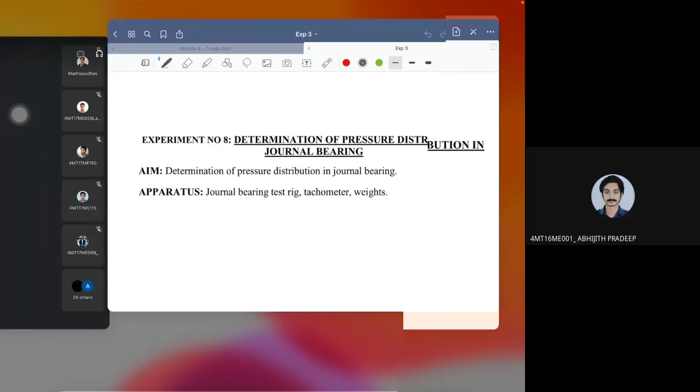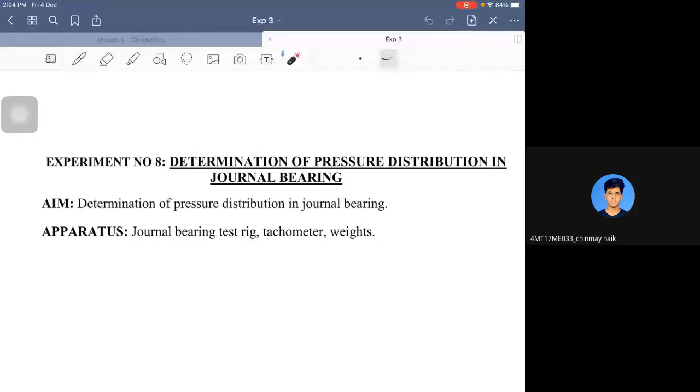Are you able to see the screen? Is the screen visible now? Am I audible? Guys, am I audible? Yes, sir. Okay. Shall we start? Okay, since no one has responded, I am hoping that my screen as well as my audio is clear to you. If you have any disturbances in these two, you can immediately stop me. Your presentation is visible, but your voice is too low, sir. Okay, I think it's because of the fan. Switch it off. Hope everything is clear now. Am I audible clearly? Yes, sir. Thank God.

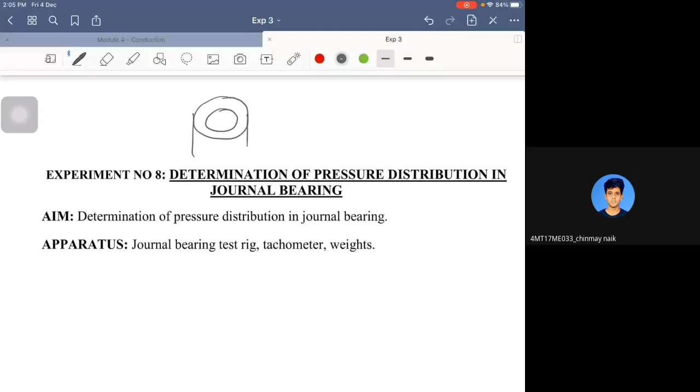Okay. So now we will start the eighth experiment, which is known as the journal bearing. The main aim of this particular experiment is, see, there will be a shaft and there will be a journal like this, right? For this journal, all this that you are seeing now is the gap between the shaft and the bearing. Journal is nothing but your shaft.

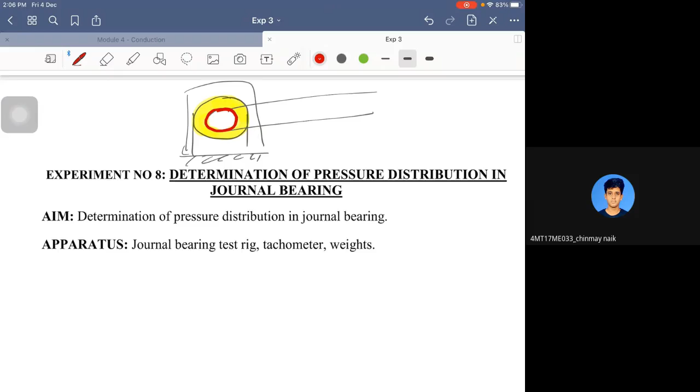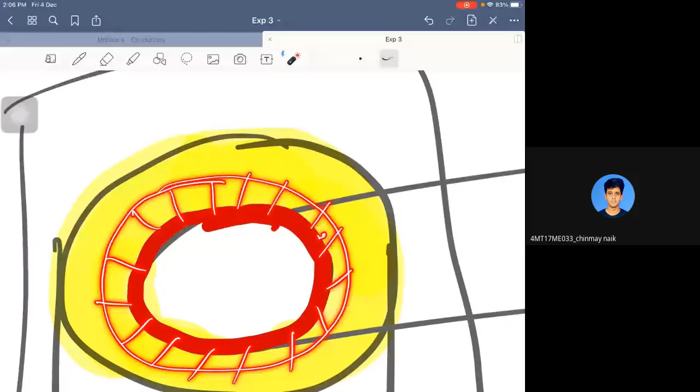So this is the gap around your shaft. The shaft is this long thing, and what is holding and supporting the shaft is your bearing. Now, when you measure the pressure across the circumference of the shaft at every individual point, according to theory, the pressure distribution across its circumference would be the same. That means it has a uniform pressure distribution across the bearing.

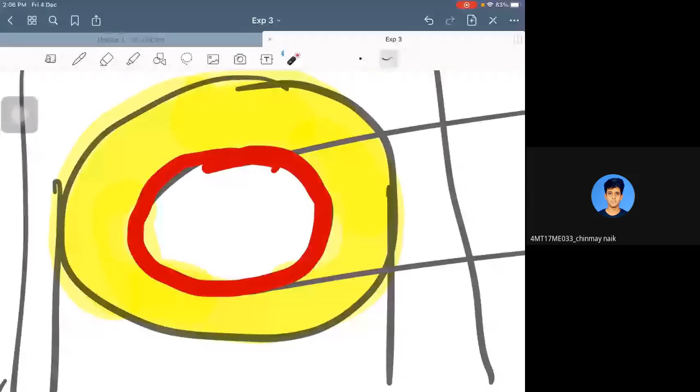But in reality, this varies. At some points it will have a very high pressure, and at some points there will be no pressure acting. So there is a non-uniform distribution of pressure across the shaft, and that is the main focus of this experiment. You will draw a pressure distribution curve along the bearing circumference and analyze how the actual distribution differs from the theoretical one. Theory says it is a circle, but the actual distribution is something else, so we will compare the two.

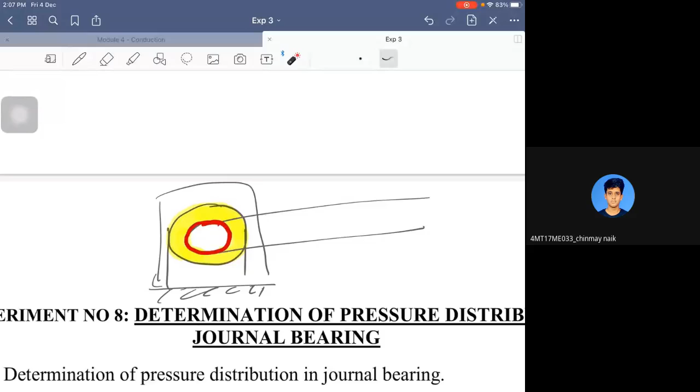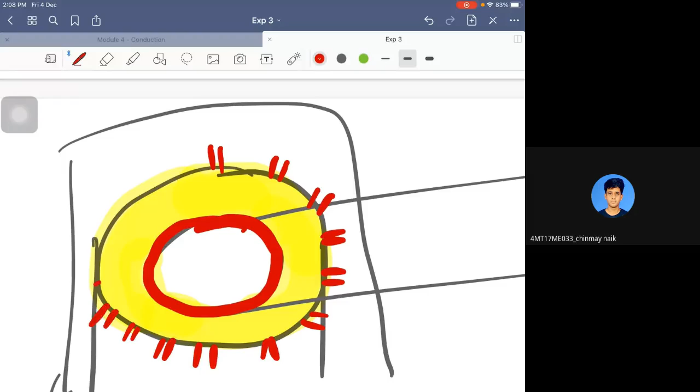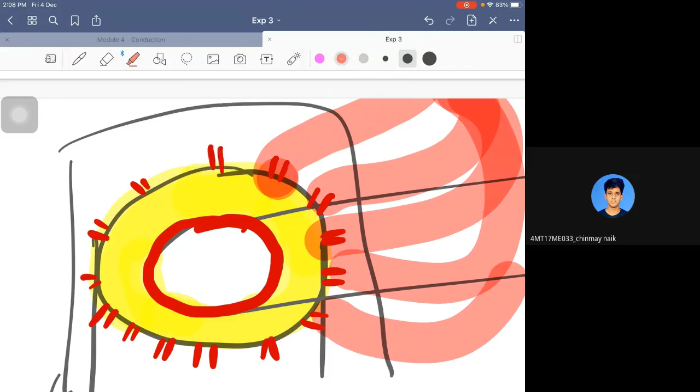To do this, around the bearing we take tappings, precisely 12 tappings. All these 12 tappings are fitted with individual pipes, and the pipes are arranged in a sequential manner so that for each pipe you can observe the oil level and measure it. That is how the experimental setup is built.

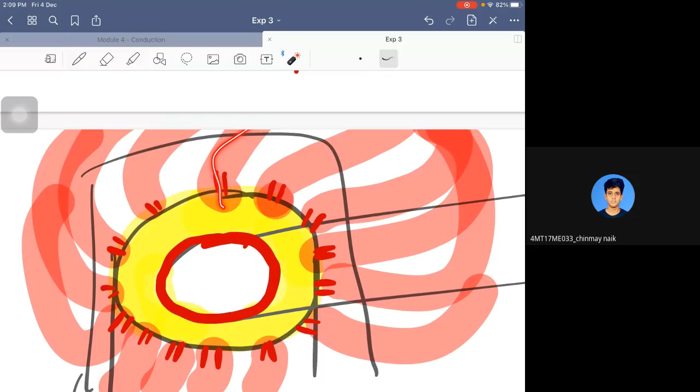So at every 30-degree interval, there is one tapping taken out. A tapping is just a hole taken out from the bearing, and each individual tapping is connected to a tube. All these tubes are aligned in a straight order on a long board to measure the height. From this height, we'll calculate the pressure and plot it around the circumference.

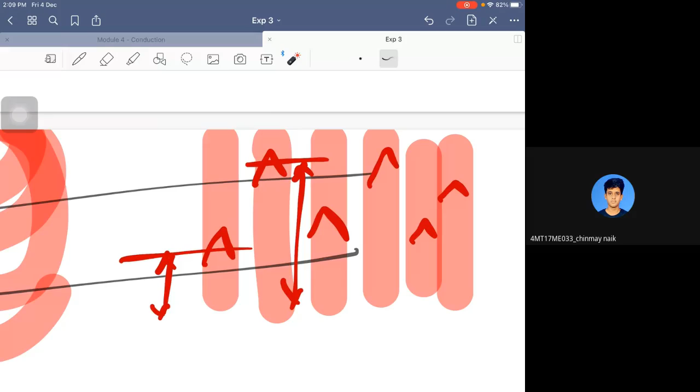That is how it is with the experimentation. Let us see how in reality it looks like. So you can see here. Are you able to see it? Okay, fine.

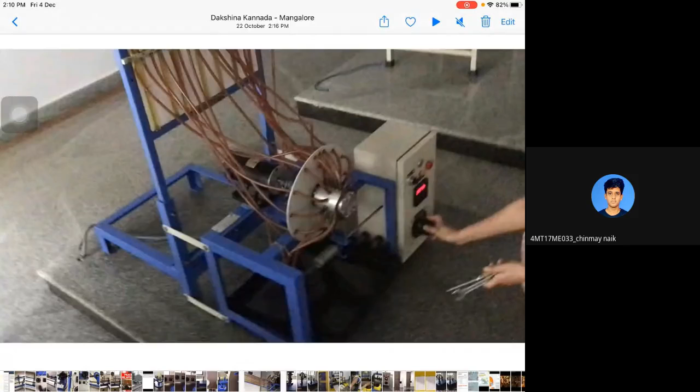This is the bearing. Around the bearing, you can see the 12 pipes which are connected at 30-degree angle measurements. For every 30 degrees, there is a single pipe connected, and all those pipes are arranged in a board like this. I'll be just playing this video, and in order to run this, there is a motor over there, which is again connected to a dimmer stat, where you need to switch on the motor and run it.

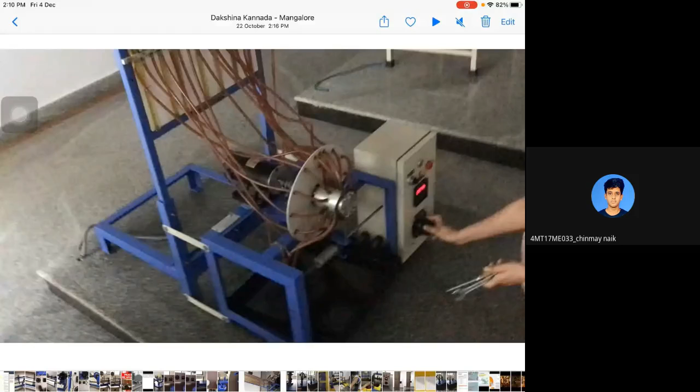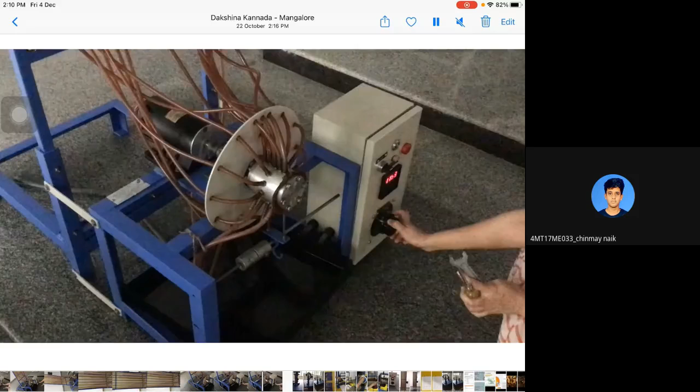Okay, just observe it. So all these pipes are connected to a board like this. Okay, and every individual pipe is mounted with a scale also in order to make it convenient to read the height of those pipes, the oil level. Okay, and that is how it is there.

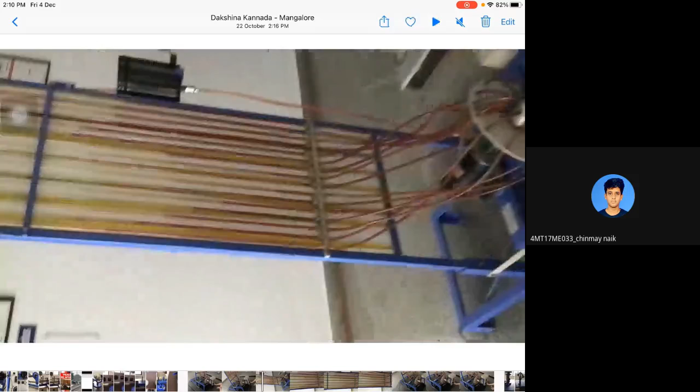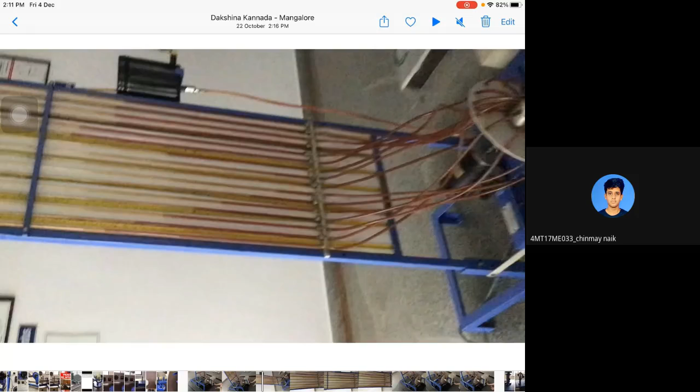Okay, now what is the procedure? So first you have to fill up this. There will be an oil tank, if I am right. Yes, here it is, the black color one. The black color one is the oil tank where you need to fill the oil, and that particular oil should be matched with the bearing oil. You have to ask the instructor which type of oil it is, whether it is SAE 40, SAE 30, or SAE 20, and all these are industrial grade.

So you have to ask for a particular oil, and that oil you have to fill up in the supply tank here. Okay, that is your supply head. That means from that particular height, you are supplying the oil to the journal bearing. Okay, so that is the first procedure, filling up the oil.

Once you fill up the oil, you have to start the motor and keep the bearing running for about half an hour. So for about half an hour, you should keep the bearing running, and you should not take the readings in between. Why? Because you need to allow the oil to heat up and maintain its temperature uniformly. That means you are waiting for its steady state condition.

No more fluctuations in the oil levels. So all those things have to be achieved. So that is the reason why you wait for 30 minutes. That means for 30 minutes, you just keep it running, and the oil attains its own temperature and own heights in the respective columns. Then you are in a position to take the readings.

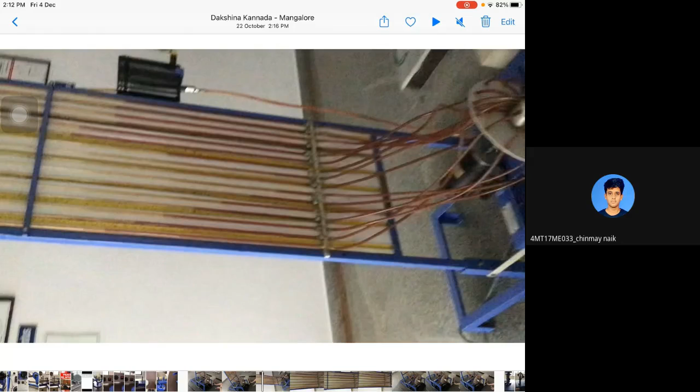So how do you take the readings? You can observe the different oil levels in the different pipes over there. In a particular pipe, you have to take down whatever is the oil level. So once you have taken down that reading, how it will look is like this. Okay, so this is the thing. What is P naught here? P naught is nothing but the supply oil head where the high supply oil tank was placed. That is your P naught.

Okay, and individual pipe for 30 degrees. So I have told you, right? For 30 degrees, what was the pressure head? That reading will be noted down. For 60 degrees, the oil has not reached, so it is 0. For 90 degrees, it is 300. Similarly, up to 360 degrees, you will note down all the parameters, I mean to say all the oil height levels.

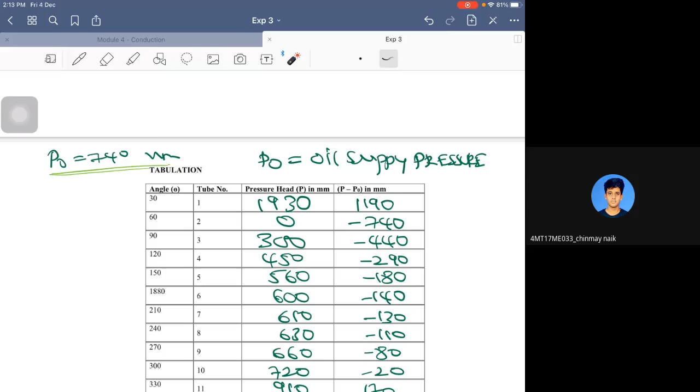Now what you have to do, you have to calculate the net head difference. In order to calculate the net head difference, you take whatever head is available in the particular pipe minus your supply head. So you subtract the supply head from the head available in the particular pipe, then you'll get the net head, which is this. It might be negative or positive depending upon the distribution of pressure. Okay, so this is the net head which is available at that particular pipe.

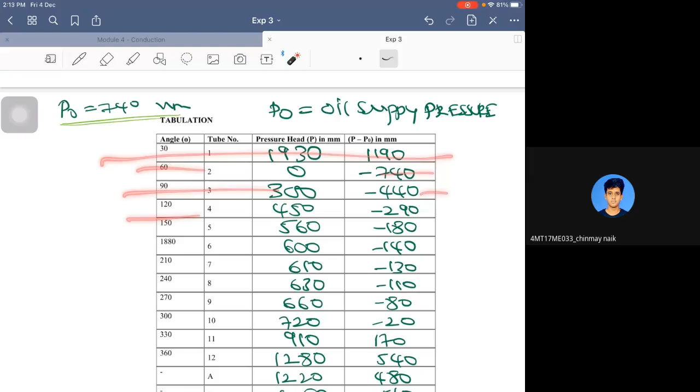And again, you'll be getting the readings in different segments, like 120, it is this much, 150, it is this much, and so on. Okay. Now, coming to the graph, you have to draw the graph. How to draw a graph? Let us see. First, you have to fix the origin, and you have to divide this graph sheet into 30-degree segments. That means this is 0, this is 30, 60, 90, and so on.

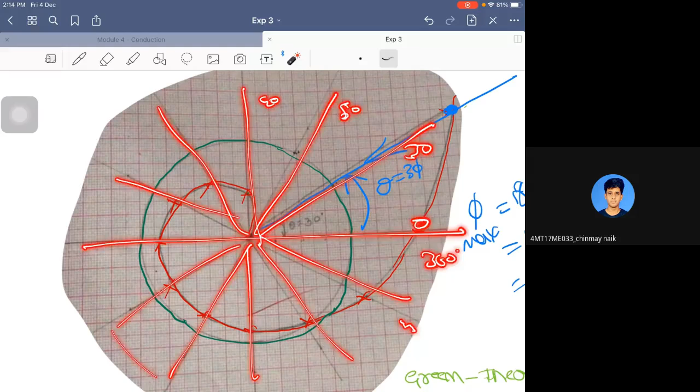So you have to divide the whole graph sheet like this into 30-degree segments all over the graph sheet. Once you have divided it, you have to name it. So this is 0, this is 30, this is 60, and this is 90, and so on, up to 360 again back. So you have to just name the whole things. So this particular segment is there. Now, this is the linear scale.

So upon matching the respective scale, seeing these readings, you have to mark the things. So that is indicated by the red line, which is here. Okay, you have to mark the things. Suppose in 90 degrees it is so and so. At this particular degree it is so and so. At 180 it is such. Just you have to mark all the points on the graph sheet which is corresponding to the total head.

So once you have marked all the readings, what you have to do, you have to join this so that you will get the pressure distribution curve. So this is what you get, the pressure distribution curve. Okay, and at one point it will break away from the normal curve. That means at this particular point, if you observe what is happening, it is totally away from the region. So you have to take it back to the origin like this and measure this particular angle.

At which angle is it breaking away? So it is breaking away at 30 degrees. So for that, 180 minus theta I have to do. So the theta is nothing but this particular angle. So it is 180 minus 30, it is 150. That is your phi max. That will be helpful in the problems. Okay, so this is the pressure distribution.

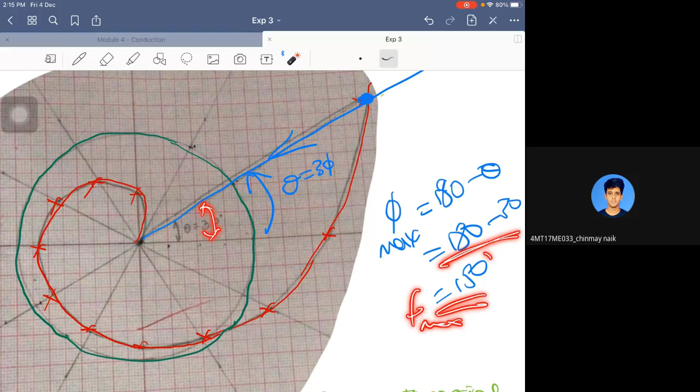If you observe carefully, there are two lines drawn, two graphs drawn. Number one is, which is in red color.

Just a minute. Okay.

So if you observe this, what I was telling is there are two different curves. The one is in green.

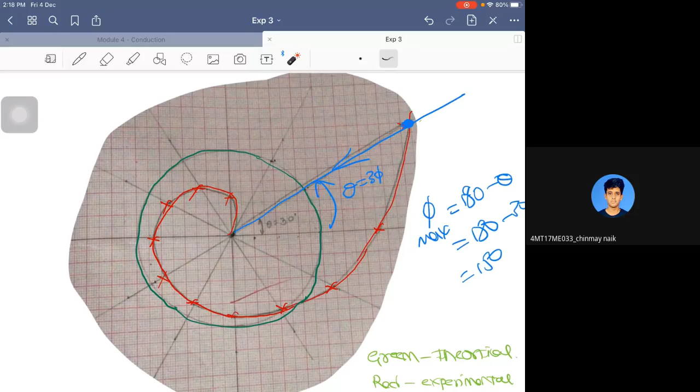Now, we shall look into the calculations. Eccentricity ratio is nothing but your n. You have to remember this formula in order to calculate your eccentricity ratio, which is cos phi max equals minus 3n divided by n square plus 2. Phi max will be obtained from the graph, if you remember. So from the graph it is 150. So the same thing you'll be substituting here. So the only unknown would be n.

So since it is a quadratic equation, you can use either your calculator or your mathematical principles to calculate it. Using a calculator, it will give you the answers very fast. So use that. So we'll be getting two answers, eccentricity ratio 2.7 and 0.7. You know that eccentricity ratio should always be less than 1. It cannot be greater than 1. That's why you are considering this value and neglecting this value. So your n value was 0.732.

Similarly, next, Sommerfeld constant you are going to find out. In order to find out, this is the Sommerfeld expression. P minus P naught is equals to minus K into sine phi into 2 plus n cos phi divided by 1 plus n cos phi whole square. So in this particular expression, phi is already known, P minus P naught you'll be just calculating here. That is equals to rho g h. Substitute the value of rho, g and h, you'll be getting the P minus P naught value.

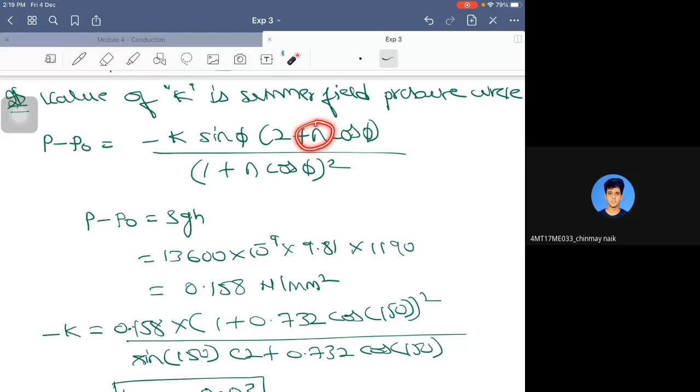Similarly, cos phi will be known from the graph. N you have just calculated in the previous step. So the only unknown in this particular expression would be K, that you can calculate as minus 0.03.

Load on the bearing. So since you are not adding any load on the bearing here. So generally, if the examiner asks, you must add certain weights in the provisions provided. If not, it is fine. So where weight added is 0, dry weight without the oil is nothing but 452.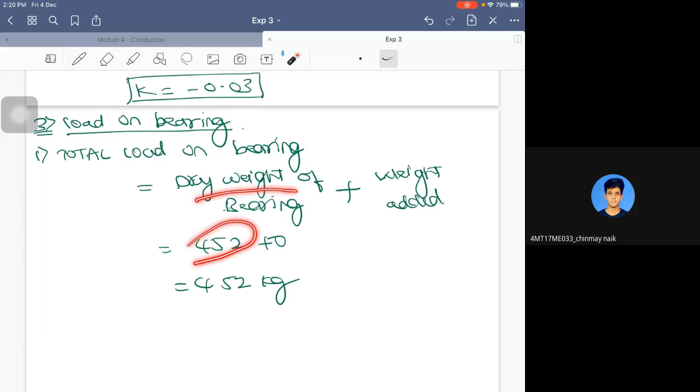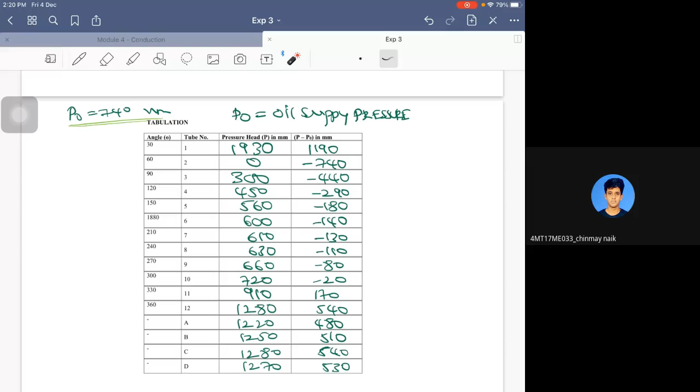That is the load on the bearing that you can measure. Now, mean positive pressure. For mean positive pressure, you have to go back to the pressure columns and search in these pressure readings for how many positive values there are. So this is a positive value; all these are positive values. You have to take a mean of all these values to get the mean positive head of this particular journal bearing. And the last is the load carried by the projected area.

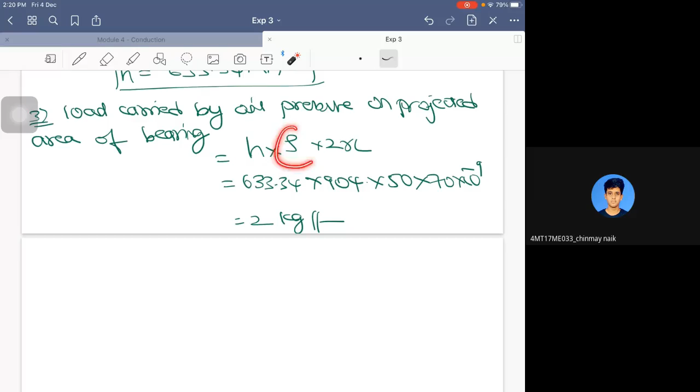To find that, it is h rho into 2RL, where h is your datum height, rho is your density, and 2RL belongs to the bearing parameters. I think I have not discussed the bearing parameters. So here are the bearing parameters. The diameter of the journal: the journal is nothing but your shaft, and the bearing is the whole thing holding it. The diameter of the journal is 50 and the diameter of the bearing is 55, which will be given to you as observations.

So the clearance is 5 mm; if you subtract these two, you'll get the clearance. The width of the bearing, that is, the total length of the bearing like this, is 70 mm. Weight on the bearing with attachments is 226. Supply head is 740, because the supply head tank is at 740 mm from the ground. Shaft speed is 1500.

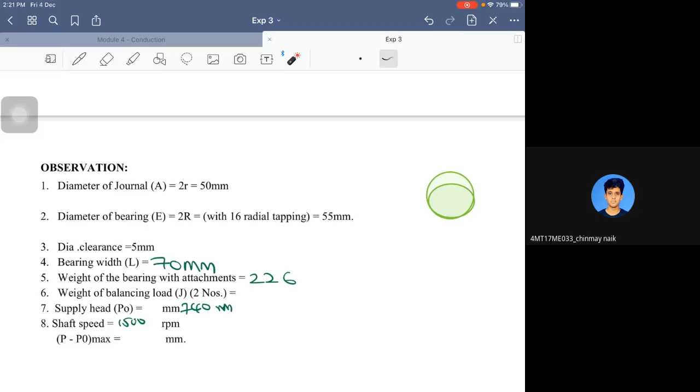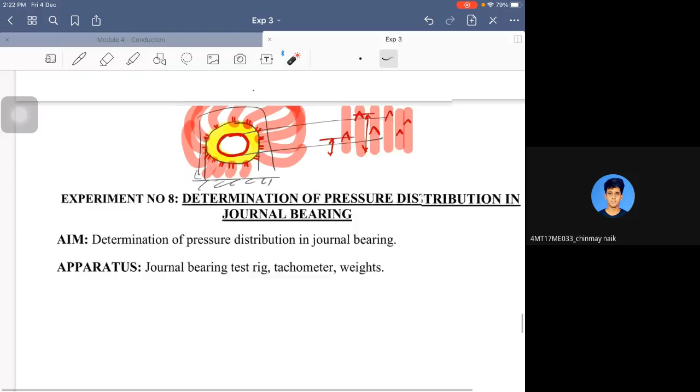If the external examiner asks you to calculate the pressure distribution at a speed other than 1500, you just use the rheostat and change the speed to what is required. Suppose they ask for 800, you just set the speed to 800, wait for half an hour, then take the readings and plot the pressure distribution. So this is all about the experimentation, guys. I think it's very easy. You have to come here and note down how to take the readings from the journal bearings. Any doubts?

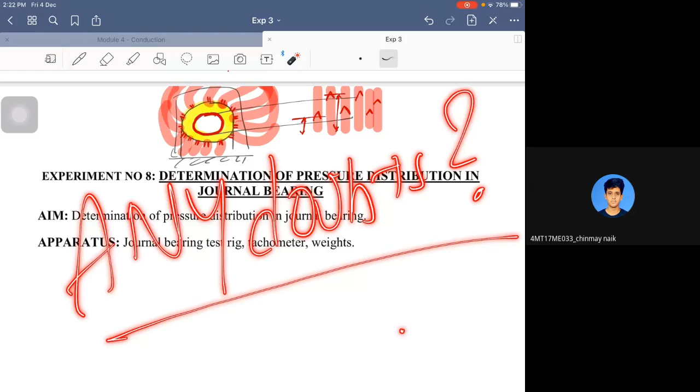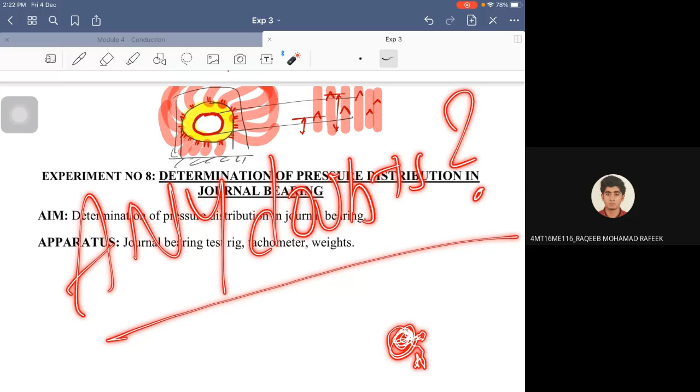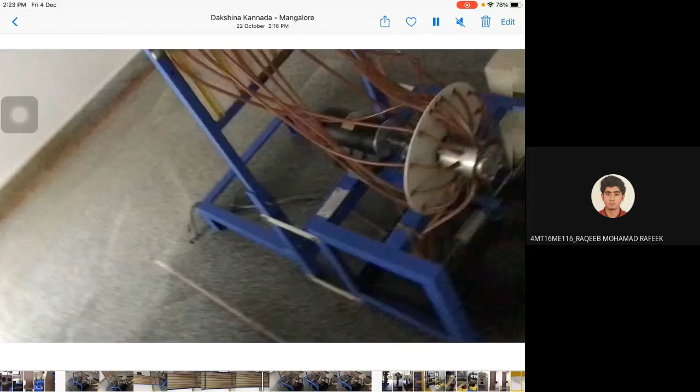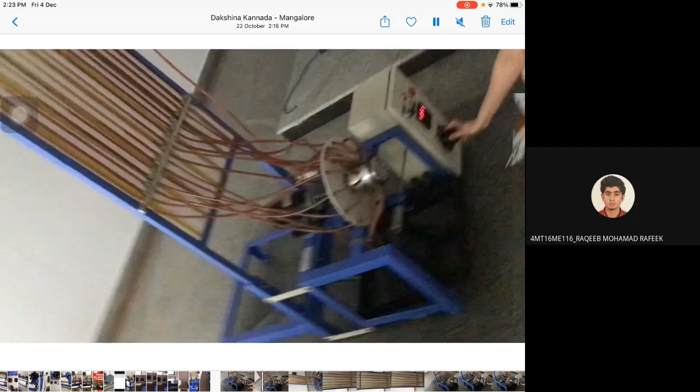Any doubts? No, sir. Understood. If you have any doubts, let me know. Okay. Do you have any doubts? Okay. So we should move to the attendance then. Okay, give your attendance.

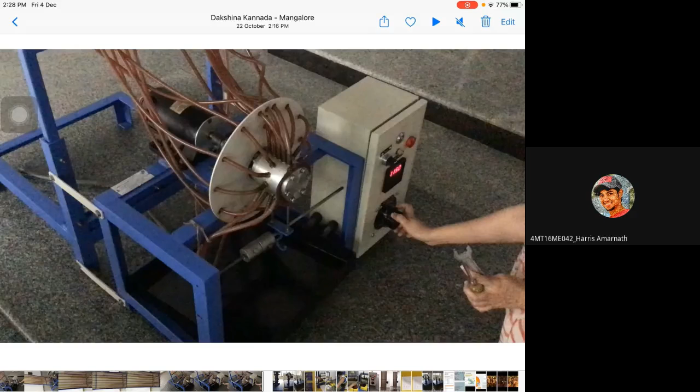Okay, guys. So we shall meet again next week. In that experiment, we will deal with balancing of rotating masses. Till then, enjoy yourself. Be happy. Keep smiling. Take care.